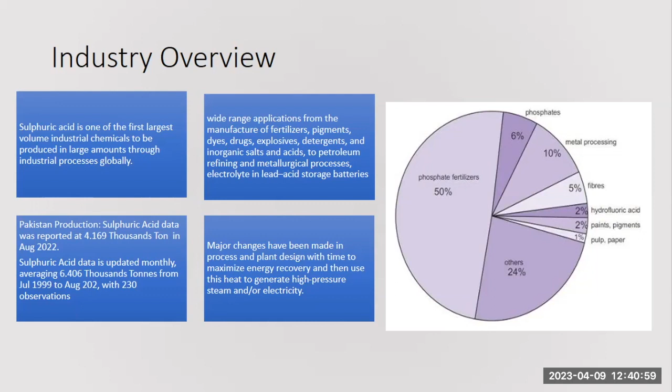Let's begin with the manufacturing process. How are we going to start it? First we have sulfur, then we produce sulfur dioxide gas, and after that we have oleum and sulfuric acid as our final product.

There are three basic raw materials for sulfuric acid production: elemental sulfur, oxygen which we usually take from the air, and water. Water is used only for dilution of oleum, provided in small quantities to the circulation tank system so that the acid gravity and density are maintained at 98.5%, which is weight per weight percentage in this case.

So what processes are employed during sulfuric acid production? There are two types of contact processes employed: single contact and double contact.

How are we going to generate sulfuric acid? There are three major steps: production of sulfur dioxide gas, then production of sulfur trioxide gas in the catalytic reactor, and after that the absorption section, followed by production of sulfuric acid by dilution of oleum in the circulation tank system.

So what are the key reactions involved? There are three major reactions I have noted down in the presentation. First, we have sulfur burning, taking elemental sulfur from a refinery or sulfur sources in Pakistan or any country.

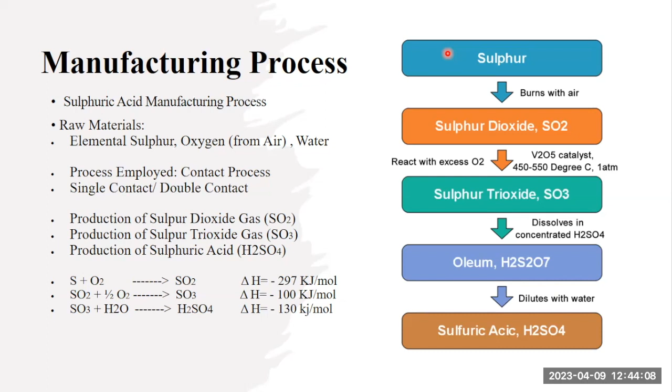A question arises here: why is H2O written? H2O is provided to dilute the sulfuric acid. Highly concentrated sulfuric acid is showered in the absorption tower, which generates oleum, and dilution water is added to break down one molecule of oleum into two molecules of sulfuric acid.

Now let's look at process flow diagrams. I'm going to explain two processes. One is the single contact, single absorption process. There is one sulfur furnace, and the process starts from the sulfur furnace where sulfur dioxide oxidation takes place. After this, the gas enters the sulfuric acid production reactor, which we usually call the converter, a four-stage fixed bed catalytic reactor.

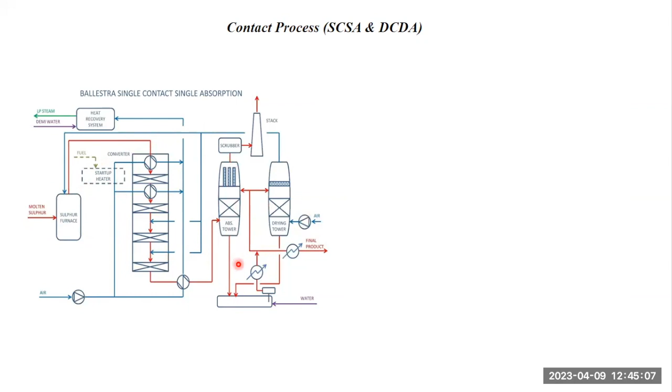After the reactor, the gas passes through the heat recovery system, and the gas is now mostly SO3. This SO3 gas is passed into the absorption section, and oleum is collected from the bottom of the absorption towers. Below the tower there is a circulation tank system.

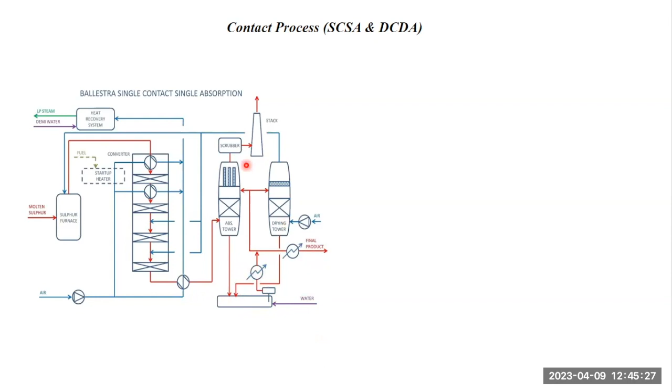Let me show you with the pointer. After the absorption section, there are two lines going into the circulation system. Water of dilution is added to generate the sulfuric acid. From there, a pump is provided, and this pump again showers the sulfuric acid into the absorption tower, so it is a closed loop process.

So what is the difference between single contact and double contact process? In single contact, we usually have one reactor. In double contact, we can have one or two reactors, but there is another heat exchanger and heat transfer mechanism involved, and the process loop changes because gas streams are interchanged between the heat exchangers. In single contact, there is only one heat exchanger, but in double contact double absorption, there is economizer 1 (heat exchanger 1) and economizer 2 (heat exchanger 2), forming a closed loop of gases that exchange heat between them.

At the first stage, the major difference is that double contact has three beds of converter separated out. The gases first pass through these three beds, not four, and then the gases interchange heat between economizer 1 and economizer 2. The gas from the third bed outlet is transferred into the interpass absorption column, where the maximum absorption is done. The remaining unabsorbed gas is then transferred into converter bed 4, passes out from bed 4 into the final absorption tower, is absorbed there, and finally the stack is released.

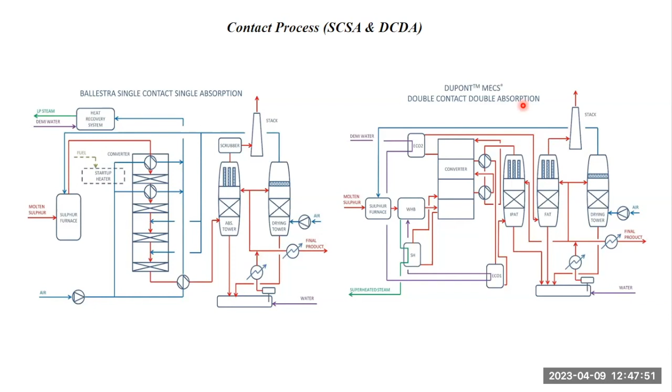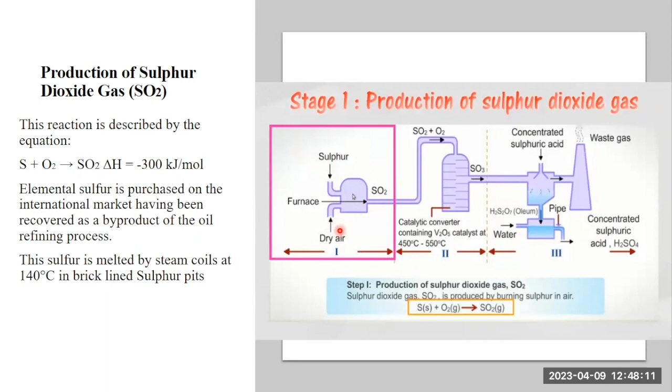Then there is a process, and I'm going to elaborate with this pointer. First you have burning of sulfur for the production of sulfur dioxide gas. In the furnace, you provide dry air, and the sulfur comes from the sulfur pump. Sulfur dioxide gas is generated in this process. It is a highly exothermic reaction, and about 300 kilojoule per mole of energy is released during this process.

After that, the sulfur dioxide gas is to be converted into sulfur trioxide gas. In this process, there is a fixed bed catalytic reactor. Pure sulfur is introduced into the furnace for sulfur dioxide production, and we usually keep the composition of sulfur dioxide gas as 8%, so that the catalyst can treat the gas coming to the reactor easily. The pressure is kept in between 1.5 to 2 atmospheric pressure, so that the reactor does not lose pressure throughout the process.

The Le Chatelier principle governs the production process in order to perform the complete oxidation and to maintain the equilibrium of the reaction. So there is a key component involved in this sulfuric acid, sulfur trioxide gas production, which we usually call the catalyst.

The overall reaction comes as: 1 mole of sulfur dioxide gas reacts with half mole of oxygen to generate sulfur trioxide gas, and the reaction usually takes place at 450 degrees Celsius with the pressure kept at 1.5 to 2 atmospheric pressure. If the plant capacity is large, more than 500 tons, the pressure is usually enhanced more in this case.

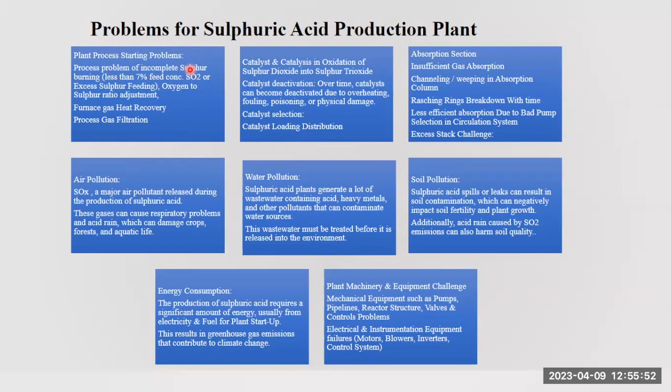And finally, we have electrical and instrumentation. We call it the E&I section problem, in which we take the failure of any controller during the production process, or any inverter failure or motor failure during production. It directly affects the production as well as the smoothness of the operation. So I'm going to discuss the problems in detail now.

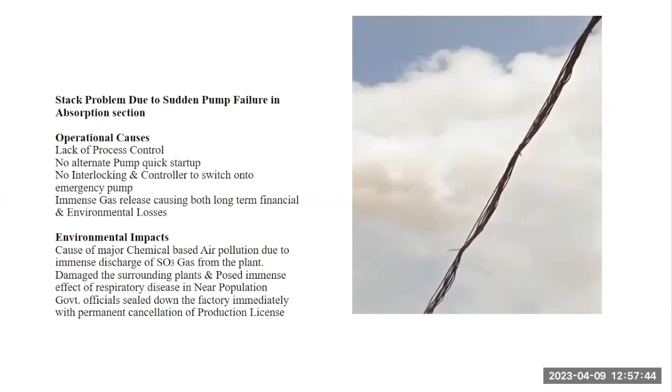As we discussed the problems in the last slide, there is the stack problem, which I'm going to discuss during the sulfuric acid production. I'm going to play the video first. Okay, now you can assess. There is the stack release, sudden stack release.

Can you see the stack release from the chimney? Yes, we can see the video, and we can also see the release. Yeah.

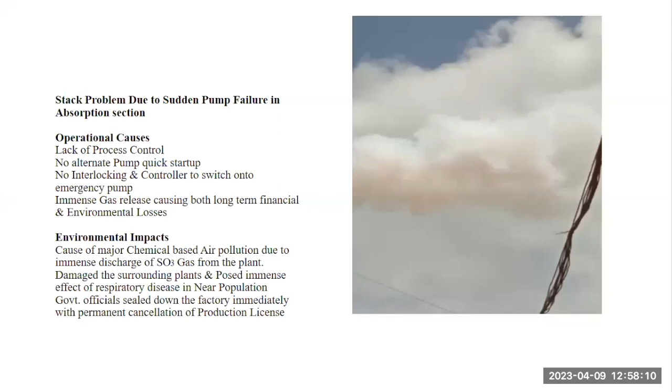There's a lot of immense stack release during pump failure. These are the production challenges we usually face in the sulfuric acid production process, and it is totally the SO3 gas, and it is directly environmental pollution.

Unfortunately, it was due to the lack of process control, because no inverter was installed during the production setup. No alternating pump was started in time. There was no switch gear installed in that switching mechanism, and no interlocking was done, which resulted in quick pump failure and no startup of the emergency pump within the time.

After that, it resulted in immense gas discharge, and you cannot count the quantity. It is about 3 or 4 tons of sulfur burnt in the air directly, and it has been a major cause of environmental pollution.

Now, what were the environmental impacts of this sudden discharge to the environment? First, you can clearly see it is SO3 gas. SO3 has a bad effect on environmental pollution, as it causes acid rain. Unfortunately, this stack has burned the surrounding crops, and a region or zone of 2 kilometer radius was completely affected due to this stack.

And the people working in that factory suddenly fell into asthma disease, and there are many diseases spread for the animals as well. The aquatic life was disturbed, the biotic life was disturbed.

The government then took strong action. Strict action was taken, heavy fines were imposed for the factory production, and the factory was sealed for further production. This usually occurs due to the negligence of management, as well as no environmental planning through the management or by the investor or any factory stakeholder, and it is clearly a human error.

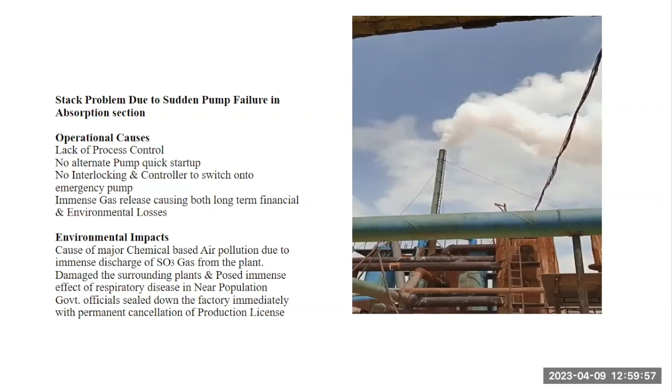Then there comes this corrosion due to the acid gas action, because if there is no complete oxidation of sulfur dioxide into sulfur trioxide, the sulfur dioxide gas is highly corrosive in action. It corrodes its own machinery. You can see there are pipelines damaged in this sulfuric acid production line; the pipelines are strongly damaged.

Even the boiler shell is highly damaged. The boiler sheet is damaged, and you can see it is almost rusted because of the release of these acidic gases throughout the production phase. It is mostly caused due to leakages on the plant, due to SOx incomplete absorption in the absorption tower, which causes the SOx discharge from the absorption section.

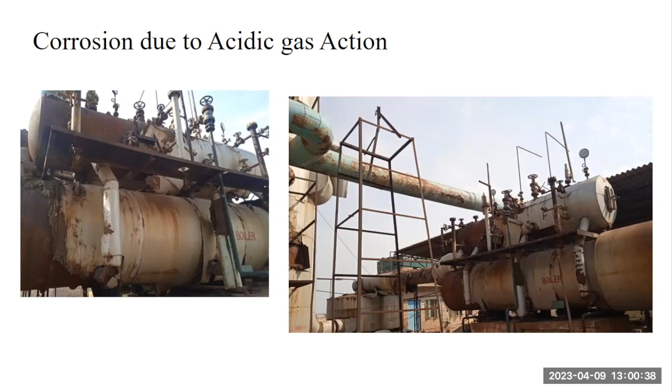Then there comes the catalysis challenge. So we have the core of the process, the catalyst, which is the most costly thing in the process, and we have to deal with this challenge throughout the process.

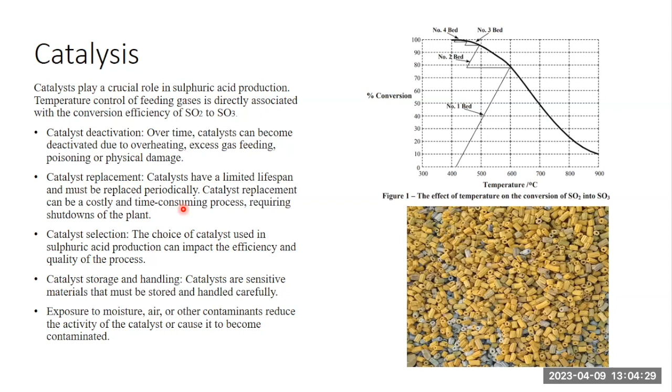So finally, how to solve these challenges? Those were the challenges, and now how to counter them. First, we are going to deal with environmental challenges.

Air pollution is the major source of pollution, usually generated by sulfuric acid production lines. The sulfur dioxide gas is usually converted into sulfur trioxide gas in the single contact process using one reactor, but the double contact reactor provides us with sulfur dioxide oxidation into sulfur trioxide twice.

We can do the oxidation of sulfur dioxide into two stages. First, sulfur dioxide gas is converted to SO3 in reactor 1, and finally the remaining SO2 is converted into SO3 in reactor 2. This provides a conversion efficiency of more than 99.9%, which ensures process safety as well as quality, and prevents us from discharging any sulfur dioxide into the environment.

Finally, how to treat the sulfur dioxide? We employ the wet scrubbing process. We provide caustic soda, a highly basic solution, for that.

After that, we have two instrumentation mechanisms in our production line. One is the SOx detector in the production hall. If there is any kind of leakage or mechanical pipeline leakage in the plant, the SOx detector will detect it and raise an alarm so that the mechanical team can work on it.

Finally, SOx detectors are placed at the stack to ensure the safety emission limits are followed throughout the production phase. If there is more discharge than the National Environmental Quality Standards allows, then the production process is checked throughout, from start to end, and efforts are made to minimize any causes of SOx emission into the environment.

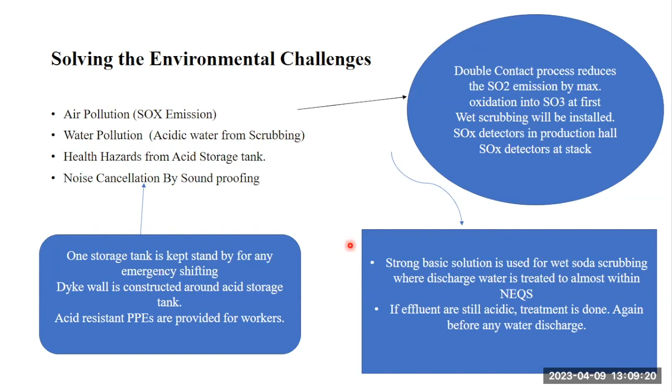Whether he is an engineer or a manager, he must follow the safety implementation rules that are defined, and the safety policy of the company must be implemented by management on site to ensure any kind of process hurdle is eliminated, as well as to eliminate risk from the process production and operation phases.

Finally, how do we do wet scrubbing? A wet scrubber is usually a mechanism with a tank behind it, basically a packed bed column type structure. We make a caustic soda solution which has pH more than 14.

To ensure complete neutralization, continuous feeding of caustic soda is done in new water to make up the new solution, and that solution is showered again and again on the tail gases left before the stack. We treat the gases entering before the stack

by this wet scrubbing process to ensure a minimal amount of SOx is released into the air. This caustic soda, or sodium hydroxide, solution is

a safety parameter for us, because we shower the sodium hydroxide caustic soda solution continuously on our acidic tail gases, and it generates the sodium sulfate solution in this process.

Now there's the reaction: first, sodium hydroxide and sulfur dioxide gas react to form sodium sulfite solution, generating a water molecule along with it. Then sodium sulfite reacts with oxygen to provide the sodium sulfate solution.

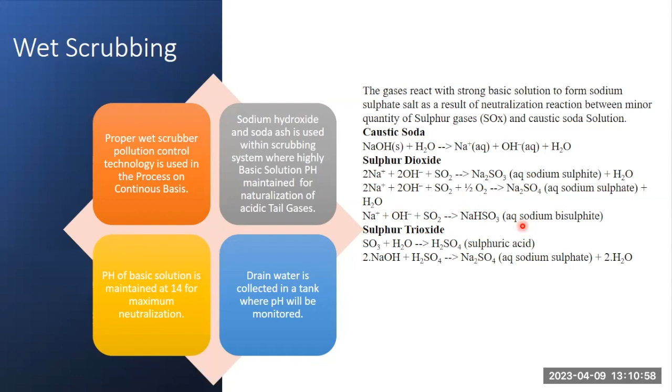Then comes the environmental management planning. How do we implement our environmental management planning? How do we ensure that environmental risks are completely eliminated throughout the production phase? We develop an environmental management plan, and it covers the following aspects.

It usually deals with environmental management to control water pollution, air pollution, noise pollution, stack problems, challenges during the production phase, and leakages from the process. And finally, we have water usage management and disposal.

We have to treat our water, take our water from natural resources, and ensure the economization of water, so that we are not using more water than the government defined quantities in our process, either for cooling, utility purposes, or process purposes.

And finally the disposal—we have to treat our wastewater generated from the plant before its disposal into the water. Then there is recycling and waste management.

The waste generated during sulfuric acid production is sulfur mud or sulfur dust. This sulfur dust and sulfur mud is again mixed with the sulfur to be fed into the plant, and this sulfur mud is collected at the end of a shutdown, then sold out to research labs, which are now conducting research on the application of sulfur for our soil.

And finally, pollution prevention—all of the stakeholders working in the sulfuric acid production line are responsible for pollution prevention and environmental management.

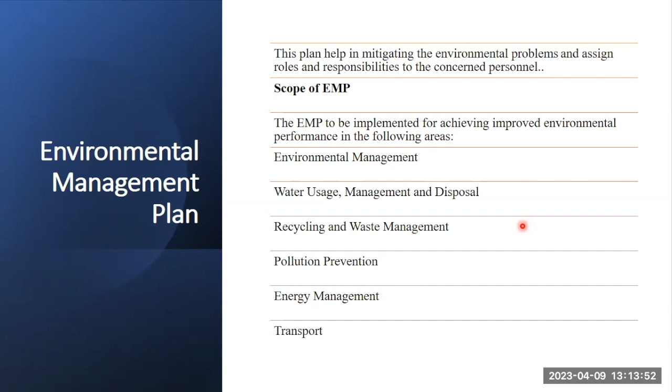What are the recommendations? So you have to define the environmental management plan. All plant stakeholders, including the management, the technical and process staff, as well as the mechanical staff, are key stakeholders in this process, and they have to ensure process safety. So how do we implement this environmental plan, and how do we cater to these environmental as well as production challenges? We usually recommend 5 to 6 priorities, and I have listed them down.

First, we must provide our environmental impact study with recommendations to our management. The environmental management plan must be followed on site, and there should be complete plantation around the scope of the project. Trees must be grown around the plant, so that the discharge of dust or any kind of gases within the plant are not released further into the environment.

Of the project site. Then a wastewater treatment plant is established in 2 units, installed on site. I usually recommend 2 units because the first unit cannot treat the water completely into neutral pH. The second stage of the two-stage wastewater treatment plant has shown quite good results in this case, and it has ensured the water quality can be used for agriculture purposes as well.

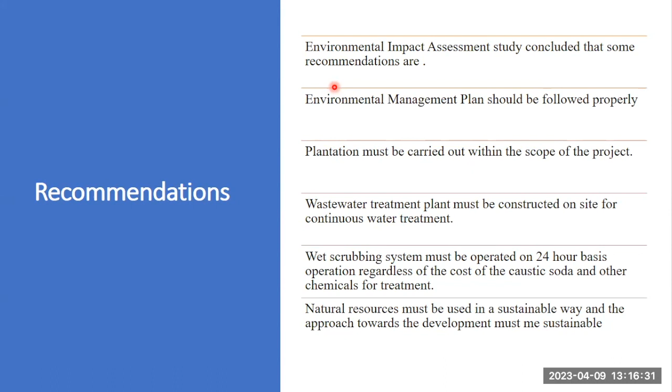So in order to implement the environmental management plan, there are five major responsibilities or concerns. One is institutional arrangements: your management, your general manager, your production manager, your mechanical manager, all stakeholders in this case, have to train their staff for reports and documentation. Complete reporting and documentation must be carried out throughout the production and operation phase, as well as for shutdown tasks and job descriptions.

And finally, environmental and social training. HSE training must be conducted on sites for all staff, including the laborers, workers, general staff, and administration - for all people working at that site. Environmental training as well as social training. Finally, the mitigation and monitoring plan. The mitigation plan refers to our document provided to plants for the mitigation of all pollution challenges we face throughout our production phase, and the monitoring.

The general manager, the administration manager, as well as the factory stakeholders are obliged to follow the planning which we have provided for our clients, to ensure the environmental management plan is working smoothly and regularly monitored and inspected by third party. Third party inspection can provide good results in this case.

That was the brief discussion of the process challenges which we usually face during the production phase and the operation phase. Now, case study one: Fazal Chemicals Private Limited.

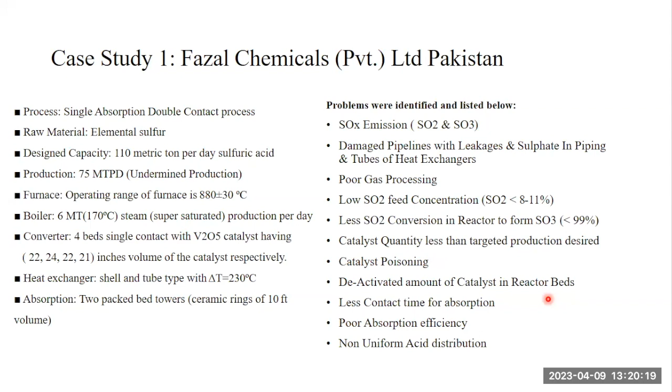So major components include the sulfur furnace, the waste heat boiler, the catalytic reactor. After that, we have heat exchanger. Finally, we have two absorption towers and one dry tower, and there is an acid cooler, circulation tank system, and finally there is storage tank system.

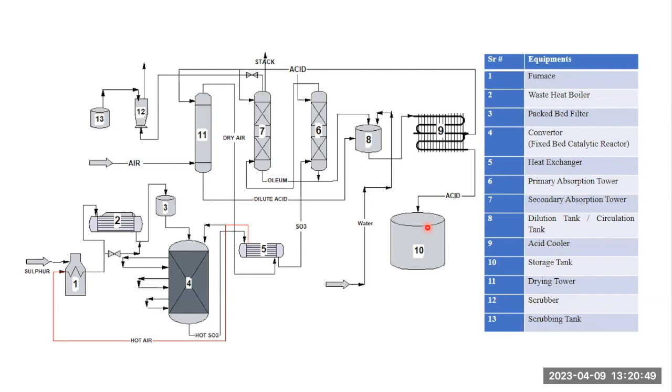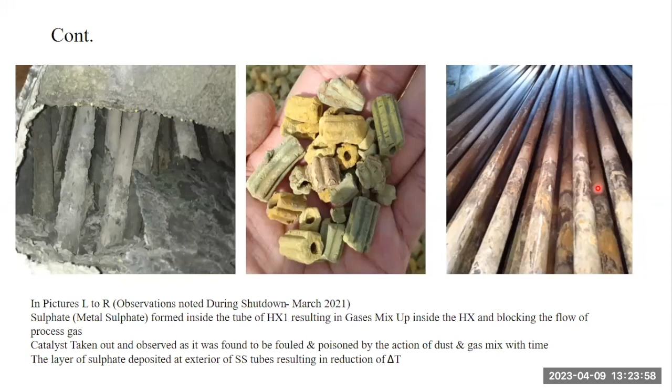And finally, at right hand, you can see the tubes of the heat exchanger, which are usually stainless steel tubes and are highly resistive to corrosion action, but unfortunately they have been corroded and formed sulfate in this case as well.

Okay, how we did the process optimization. You have seen all of the causes from this process, but now you're gonna see the process optimization. We did it directly from transforming

conversion efficiency, enhance the process, and the results are better in case of double contact, double absorption plant. Finally, for ensuring the feeding section, we enhanced the plant feeding sulfur ratio by replacement of the air line for the sulfuric acid, and excess air supply was provided to ensure complete oxidation. We also placed a concentration analyzer, an instrumentation equipment to ensure the conductivity of acid at 98.5% of the acid in the absorption tower, and it optimized the capacity of the acid.

Finally, we increased the volume of the catalyst for the required process, because the volume of catalyst at that site was less than required. They had been operating the plant with 60 drums of catalyst for a 100-ton plant. It was an immense mistake, a kind of human error made by all of the plant management because of lack of knowledge and experience in this regard.

So they placed the catalyst, and I provided them a quotation demand for the catalyst requirement, and we enhanced the catalyst quantity in our plant, using cesium doped catalyst. This is basically a catalyst which has 7 to 8% of cesium deposited on the layer of catalyst, which enhances the oxidation process for sulfur dioxide conversion.

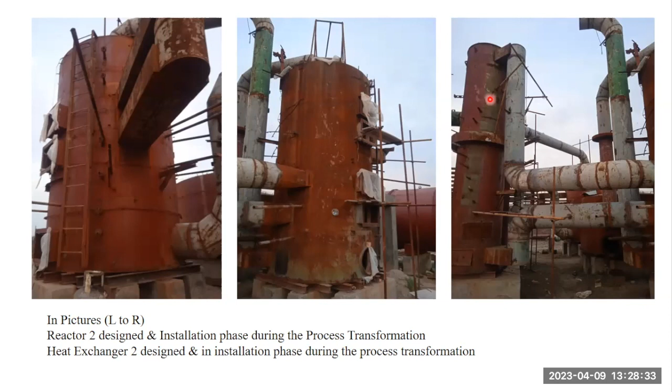There are some pictorial glimpses of unit placement, showing how we placed that air line. As we placed the complete air line for excess air supply, the first line diameter was less than required, resulting in reduction of air supply and airflow of the gases. So we increased the line diameter after designing and calculation, and replaced that air line as well.

And we implemented a complete DCS control structure policy. I'm going to show you the SO3 SO2 production line. You can see it is a complete human interface built by the DCS system, allowing any operator to directly see the parameters of gases passing through the reactor on this computer screen, control the process, and ensure process smoothness.

The engineers and operators are obliged to ensure process safety throughout the production process, and now the plant is operating on a double contact double absorption system.

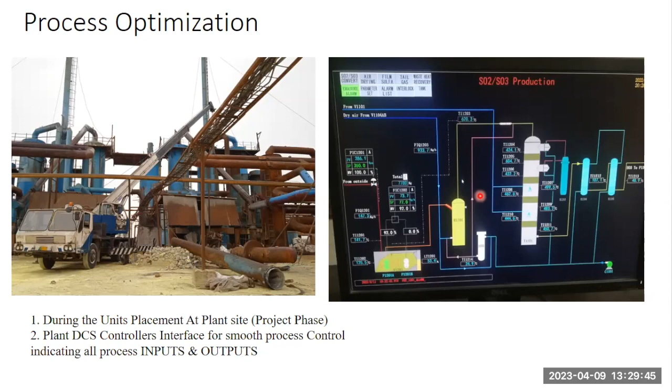So in this complete whole, you can see all the causes noted down and provided in this list. And after that, you can see how we implemented the process optimization and how we achieved the process optimization goals. Now there is our case study 2.

That is Pakistan, located in Multan. Okay, how we did the process optimization? First, we have

the plant structure. You can see the plant structure on the right hand. It is highly corroded due to the negligence of operators, as well as no proper shutdown SOPs being followed during the shutdown of that plant.

Unfortunately, this plant has been banned due to license cancellation because of environmental discharge from the process plant. The plant released that gas, and the video I was showing you just before was another industry, but unfortunately the problem that occurred for this plant was also the same.

It has also released that stack from the process plant, and it caused the ban and the cancellation of license of production for this industry as well. This industry came to me for consultancy, and I am still in process for these clients.

So what are the causes of this process? Full production process control failure. No educated operator were kept on this site by the management, and they have no experience of process control. No controllers or any type of mechanical or electrical inverters or switch gears or synchronizer were installed on this site, and lack of maintenance.

They have no schedule of maintenance for the plant. How to conduct the maintenance activities? How to make that schedule for maintenance of plant, and how to avoid any kind of non-scheduling activity for this plant.

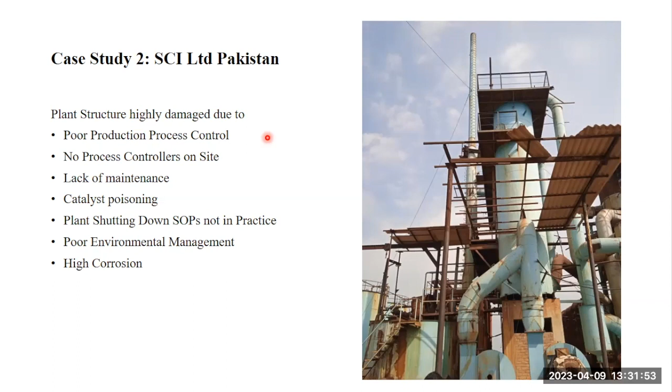Unfortunately, no acid line or gas line was cleared, and the plant was just shut down by switching on that button, which causes a bad effect on the plant structure, and it has damaged that plant into a complete rusted plant. Now it has poor environmental management and high corrosion activities involved in this plant.

So you can see the process flow diagram for this plant. In this plant there is some mix up of single contact and double contact type scheme. So we have first, and we have a heat exchanger involved between the first and second pass of our reactor.

Although the other structure remains the same, there is no bypass line between the boiler and the packed bed filter in this case, and there is an air AQC installed instead of heat exchanger, and there is a blow. So the whole structure is single contact, but the absorption section is double, so we call this plant a single contact double absorption plant.

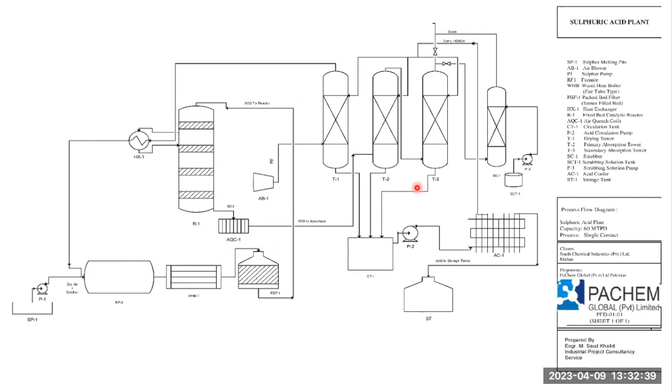Okay, so this was the unit, and I will provide you the presentation material, and you can clearly view this diagram by yourself. The equipment are listed down, as well as the consultant, as well as all of the description noted down in this diagram.

So now coming back to the point, no line was cleaned, no acid line was cleaned during the shutdown. No acid was collected in the circulation tank. The acid remained in this line, and you can clearly see.

I can show you by the pointer that this line is made up of cast iron, which is a highly corrosion resistant iron in this case. But unfortunately, with the passage of time, the rusting action has completely eaten up the whole elbow of the pipe. You can clearly see.

And there comes the tube header section of the heat exchanger, and you can see the complete sulfate formation on the top of this region. The yellow structure you can see is completely the sulfate formed due to the result of high corrosive action, as well as some of the highly corroded section below, which I'm now pointing you.

And finally, you can see the acid quenching coolers. These coolers must be made empty before any type of process shutdown or any mechanical activity. But unfortunately, the people doing the job there were not realistic about that, so they did not realize the importance of this section, and they left this section, and the line has been completely damaged from this section.

You can see that there is a complete pipe eaten up between this, and there is a lot of scaling and rusting on this acid cooler, so it has to be completely changed.

And there are many more on this site. This site I visited last month in Multan, and there are many more problems on this side instead of corrosion and any kind of catalyst issue.

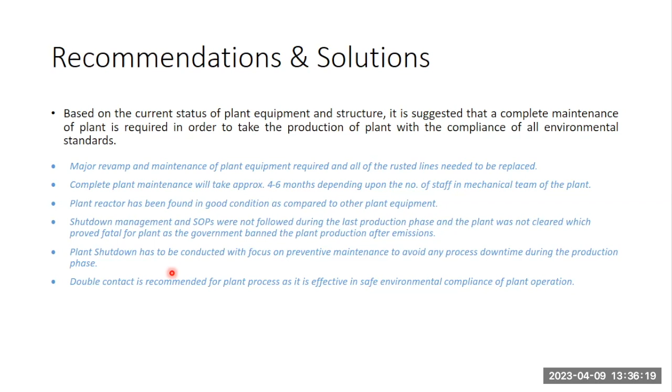So now we come to plant HSE analysis and risk assessment, and how to ensure HSE compliance for our production plants. Sulfuric acid is unfortunately not a large scale industry in Pakistan. I've highlighted two case studies in my presentation, and you can clearly see that management action and staff action are completely responsible for all the process troubles in these cases.

So how are we going to do process analysis and risk assessment for our plants? First, we list down the hazard and its effects, what the challenges are, how to address these challenges, who will be responsible, and finally, what is the time to take that action.

For example, we have gas pipeline leakages. These can occur during the plant production phase or plant startup phase. During such leakages, plant staff or the environment can be damaged, because the gas is discharged into the environment. People working in that area can breathe that dangerous gas, which can result in issues for their lungs and cause asthma.

How do we cater to this challenge? We have to do maintenance, and the plant mechanical staff is obliged to ensure leakage maintenance, either before any plant startup or on-site during production. On-site during production means that if any leakage occurs during the production phase, we usually take a break of around 10 to 30 minutes for leakage maintenance, which we call a short notice shutdown activity.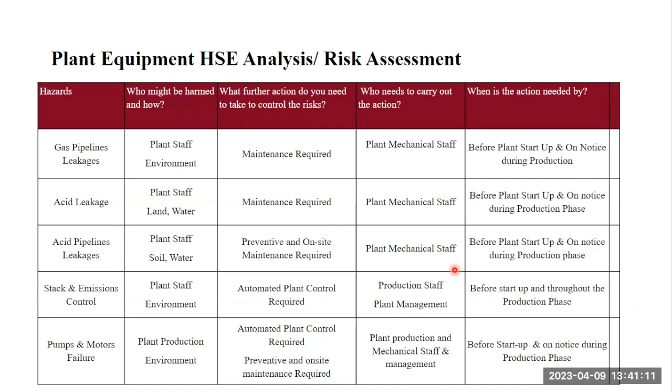So finally, how do we eliminate that risk? We have to install automated plant controllers, protective equipment, and ensure on-site maintenance by production maintenance and mechanical staff. We do this by installing the mechanical and electrical systems before plant startup and shutdown, or during plant notice period activity, where if we have trouble like pump replacement, we shut down the plant for about 1 to 2 hours, and the whole activity is conducted and supervised by an engineer to eliminate any risk to the environment and plant personnel.

So next is mechanical compliance and operation and maintenance. Maintenance is the key concern for process smoothness. Process safety is directly related to and reliant on the maintenance level achieved by the plant production staff. So how are maintenance tasks done, and what jobs need to be done throughout the production phase? There are six key sections of the sulfuric acid production line.

First, we have pipeline repairing and maintenance. Then we have boiler repairing and maintenance. Third, we have the reactor and absorption towers section. Finally, we have circulation and air cooling to air quenching coils. AQC stands for air quenching coils and heat exchangers.

So how do we do this? We divide the plant into six sections, and after that we start with repairing our pipelines, all of the acid circulation pipelines, gas pipelines, or any pipeline in our production process. We do it by welding, fabricating, or line replacement. If any line is badly damaged or affected by corrosion, we totally replace that complete part with a new line.

Then we move to the boiler. Here comes tube replacement, shell replacement, and third party inspection of the boiler. First we ensure tube replacement if any tubes are damaged, then shell replacement if any shell needs replacing. Third party inspection services are taken to ensure boiler safety and to check the pressure limit.

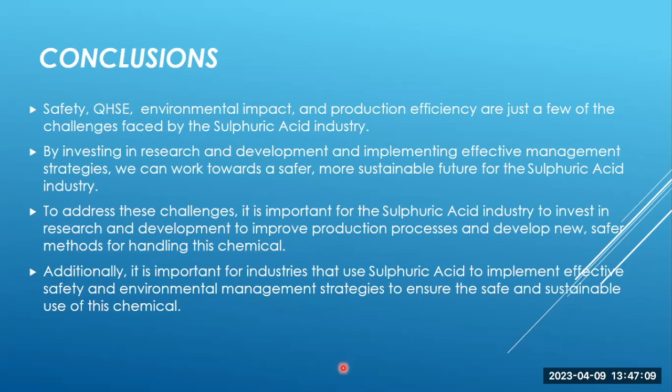Finally, it is important for sulfuric acid industries to use environmental and effective safety compliance management strategies to ensure the safe and sustainable use of this chemical. I have provided you a complete overview of sulfuric acid industries and the challenges.

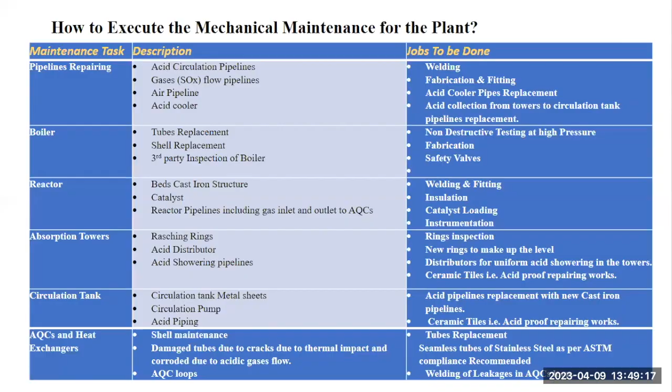Like if anyone is interested to reach me, just follow us. I have a question. Yeah, there is a question.

How do you measure the thickness of piping? Do you use corrosion coupons for the corroded amount of the pipe, or how do you measure that?

During the shutdown activity, we measured the affected corrosion layer by taking out the pipe, and we took a good sample of that pipe that was placed in the heat exchanger. We compared that, and the layer deposited, or the layer which was eaten up, the sulfate deposit layer was calculated by mechanical etching, rubbing the pipe, and the sulfate was taken out. After that we saw the complete thickness reduction of the sulfate-eaten pipe. So we compared it with a good quality pipe placed in this tube, as well as the pipe eaten up by sulfate.

We measured the thickness through mechanical QC inspection, and mechanical staff provided that measurement using mechanical equipment such as screw gauges and other mechanical tools.